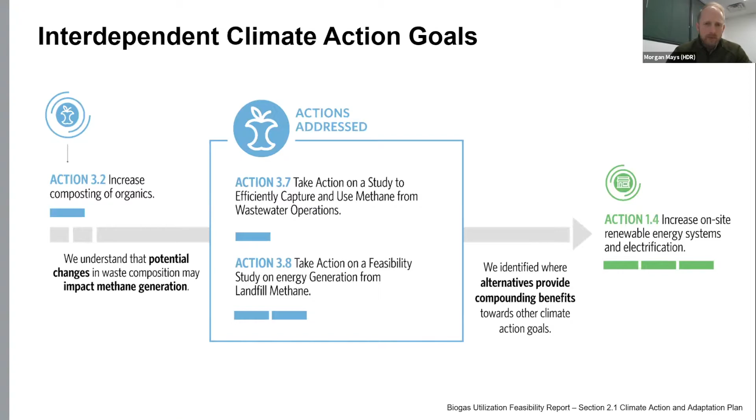So just a brief history of the project. We started this about a year ago, really. Last February, we provided a waste shed analysis, looking at the solids and organics currently managed by both facilities, as well as what an incremental increase of waste could do to biogas production.

Then we looked at both facilities as a whole, at what their existing and future conditions were going to be, and the opportunity for any recovery and reuse of biogas through the study period, which was a 30-year time period, so from roughly 2020 to 2050.

Then in May, we provided a biogas utilization technical memo that evaluated all the different options we considered for utilizing that biogas at both facilities, and included a natural gas pipeline injection option, electricity generation, and also a natural gas replacement.

In August, we tied this all back together into what I believe you received a copy of in your packet, the full feasibility study report. That evaluated the current and future reuse alternatives and considered the greenhouse gas emission reductions, the energy return on energy invested, and the SROI framework.

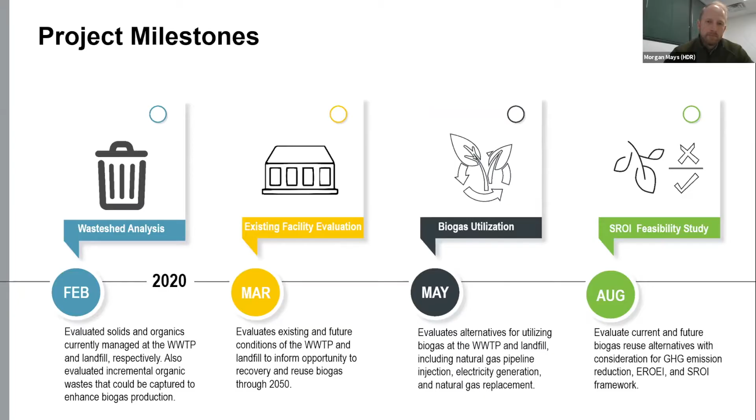So briefly, existing conditions at the two facilities. If you're not familiar with this, the wastewater treatment plant itself is the largest user of electricity and natural gas within the city. It processes approximately just under 11 million gallons a day. Methane there is produced predominantly on site during that anaerobic digestion, and then is currently reused on two on-site boilers that heat the biosolids and promote that digestion, and then the remainder is flared off. I believe about 80 SCFM is produced currently at the wastewater treatment plant.

At the landfill then, it's a full MSW landfill, serves Johnson County, Kalona, Riverside, manages approximately 130,000 tons a year of waste. And then food wastes are approximately 25% of that total waste mass, so about 34,000 tons. Methane there is produced during just the waste decomposition process, collected and then flared currently to the atmosphere. Current levels have that around 945 SCFM. So really a true order of magnitude difference between the wastewater treatment plant and the landfill. So that's something to keep in mind when we look at alternatives.

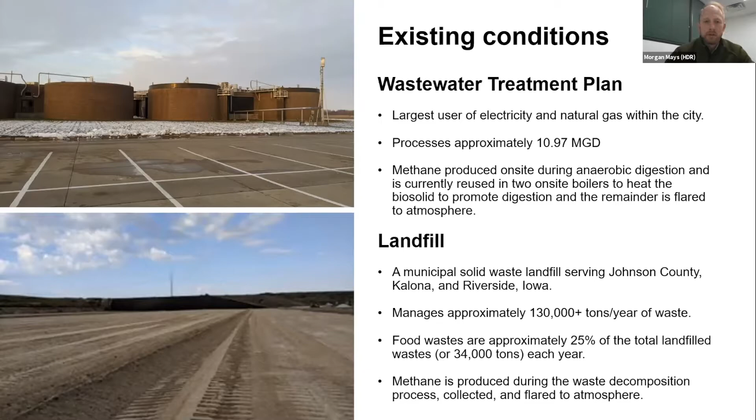With that, I'm going to pass it over to Marcella and kind of talk through the process. Yeah. All right. So as Morgan mentioned, in your packet you saw the feasibility study. Just want to point out that throughout the rest of the presentation, you'll see little footnotes that reference specific sections to that. So as you look at that and cross-reference this presentation, hopefully this orientation will make your review a bit easier. So I'm just going to spend the next few minutes reviewing the alternatives as related to both the facilities, the waste diversion scenarios, and the greenhouse gas emission impacts that we built into the SROI model that Jeremy will talk about. Go ahead, Morgan.

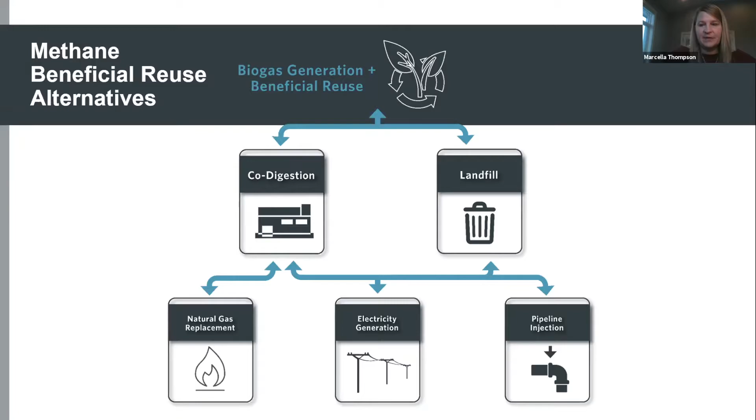So, as Morgan explained, there are two facilities that we looked at with regard to biogas generation and beneficial reuse. That is the landfill and co-digestion. Again, just reiterating that the landfill is orders of magnitude more biogas to work with, which certainly factors into the greenhouse gas emission reduction potential. What's interesting about these facilities, and we see this across cities, is that while they in themselves often represent a very small part of the city's greenhouse gas inventory, they themselves are also enablers of change. So in addition to managing emissions at the sites, you can also offset emissions, which is why reuse is such a strong potential.

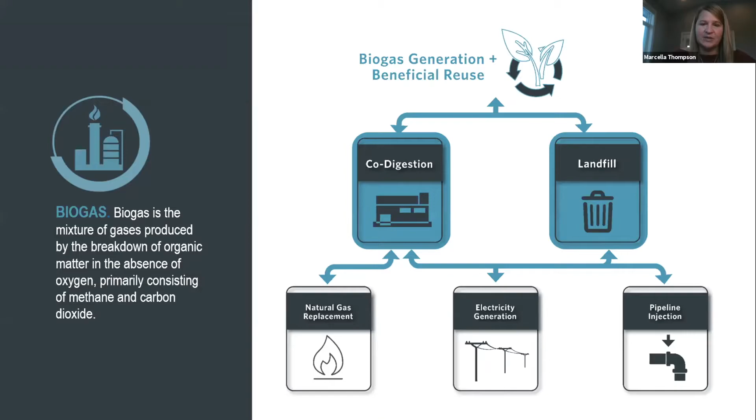So the first option we looked at, which we will refer to as alternate 1, and 1A is co-digestion and pipeline injection at the wastewater plant, and alt 1B is the same thing, pipeline injection at the landfill. So this is where we would take that biogas, clean it up to pipeline quality, inject that into the pipeline to a standard that can meet the renewable fuel standard, and sell that on the RIN market. So the city would benefit through some direct emission reduction on site. There would not be the same offset within the city boundary, as those purchasing the RIN credits would get the reduction out in their realm.

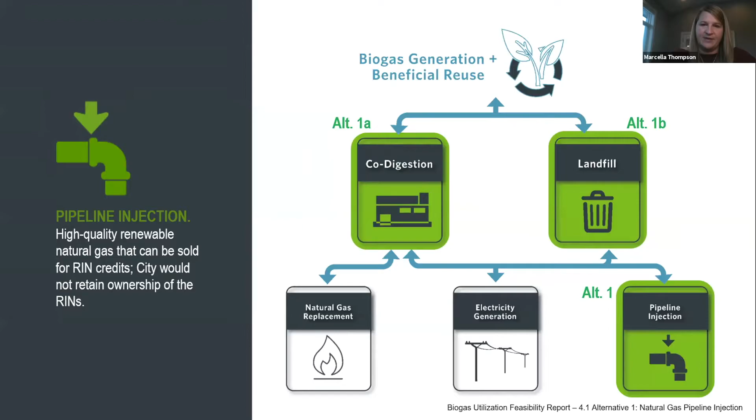The second alternate is electricity generation. This also applies to both the wastewater treatment plant and the landfill. You can advance, Morgan. So this same concept, different scale at both facilities, where we would take that gas, clean it to a quality that it can be used in a generator on site. And then in both cases, we've assumed that the quantity of electricity generated is greater than any of those facilities can consume. So it would involve a partnership with your utilities to put that back onto the grid. We assume that through that agreement, you would be able to retain the renewable energy credits, which would help offset a portion of the city's electricity use with that on-site renewable energy generation.

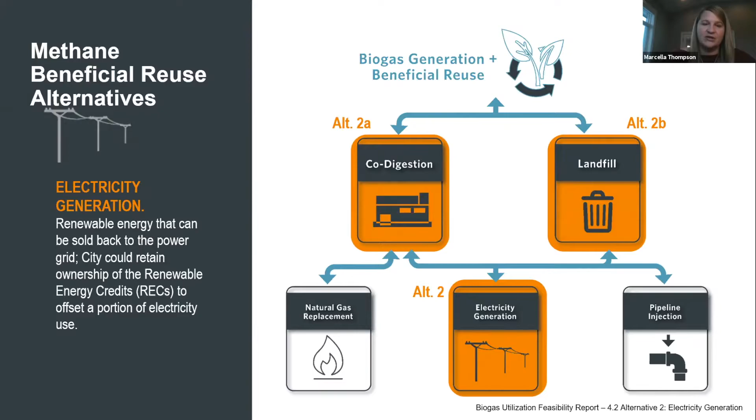And then the last option we looked at, alternate 3, that is natural gas replacement. That one only applies to the wastewater treatment plant. And so that, again, similar to pipeline injection, where you're cleaning that gas up to essentially equivalent to natural gas, but it would be used on site to displace natural gas that's used. So you realize a cost savings there, as well as a greenhouse gas reduction benefit. Just as a reminder, in all cases, when we're thinking about biogas, it's considered a biogenic carbon source. So when you're composing your city inventory, biogenic carbon is reported separately. So you would realize a reduction related to natural gas or electricity generation.

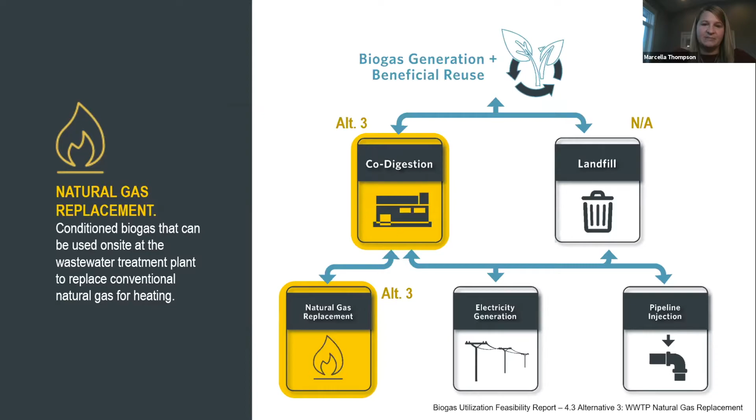So another important factor, so we just walked through 2 facilities with 3 alternates. The other key factor was, as Morgan mentioned, we understand that a lot of your climate action strategies are interrelated, and certainly in the case of organics management and what the city pursues from incremental diversion will impact those alternates.

So we looked at 3 scenarios. One is the business as usual, right? How much organics is being diverted today. We also looked at a scenario which we called the 1,500 tons per year scenario, which represents the incremental capacity of the wastewater treatment plant to co-digest those organics.

And then the second one is a low diversion alternative. So that is a 20% incremental capture of organic material, which equates to about 8,500 tons per year. So that would be in pursuit of that organics recovery climate action strategy. And we looked at these scenarios specifically in those earlier studies in terms of how would that impact the methane generation, both at the wastewater plant and the landfill.

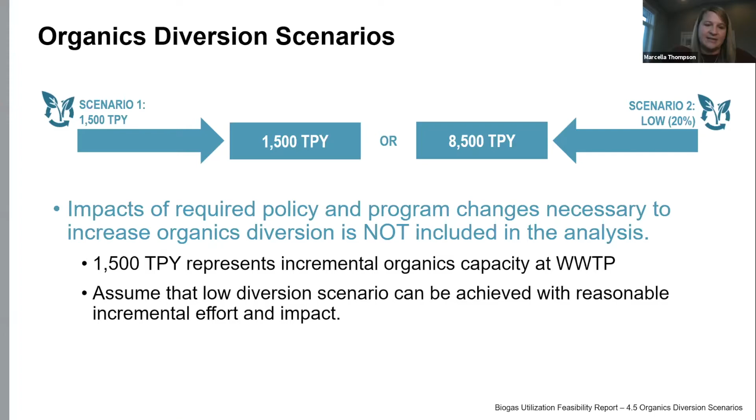And then we ran through the SROI analysis for, again, 2 facilities, 3 alternatives for these 3 different scenarios. So there's lots of iterations that will come to light as Jeremy presents his results. The last thing I wanted to touch on is the greenhouse gas emissions impact that we considered. And you can see here, we've got table 10 within that report. So there's one of those cross references for you.

We looked at 3 different greenhouse gas emission impacts. One is the direct emissions. So it takes energy and results in emissions to add additional equipment to scrub the gas, to run the generators, right? So there is some invested carbon in those technologies. So we looked and accounted for any incremental emissions from those processes to beneficially reuse the gas.

We also use the EPA WARM model to consider life cycle, cradle to grave impacts. And that really came into place of the alternates where we went from the baseline, business as usual, what you're diverting, to what happens if we pull that out of the landfill and co-digest that, or if we composted that, et cetera. So that accounted for the life cycle emissions from those landfill diversion alternatives.

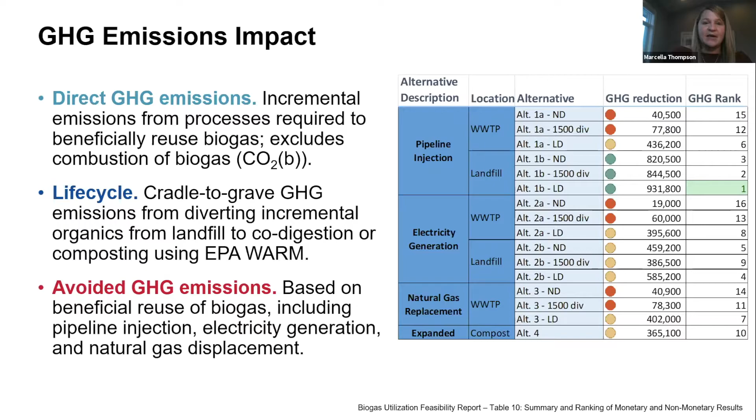And then the third one is avoided emissions. So particularly in the electricity generation and natural gas displacement, there are avoided emissions from not having to procure that electricity from the grid or buying natural gas and combusting that. And so those were accounted for as well. And so that's one of 2 key inputs into the SROI model. The second one was also the energy return on investment that I'll let Jeremy talk about.

Yeah, thanks, Marcella. So energy return on investment is basically a fairly straightforward calculation. So it's a ratio of the energy output that's gained against the energy input that's required. So think of it as a ratio of how much energy do you get versus the required energy to produce at a set or a given level of energy output.

So similar to the greenhouse gas emissions for this analysis, we worked through basically what is the equivalent amount of energy that's delivered, whether it's natural gas or electricity, and then put those all in common units and compare the energy output minus any of what we call parasitic energy, or the energy used to produce that level of output, and then created a ratio of that against the direct energy input. We also computed this over the life cycle of the project, say over a 30-year period, and then computed that ratio.

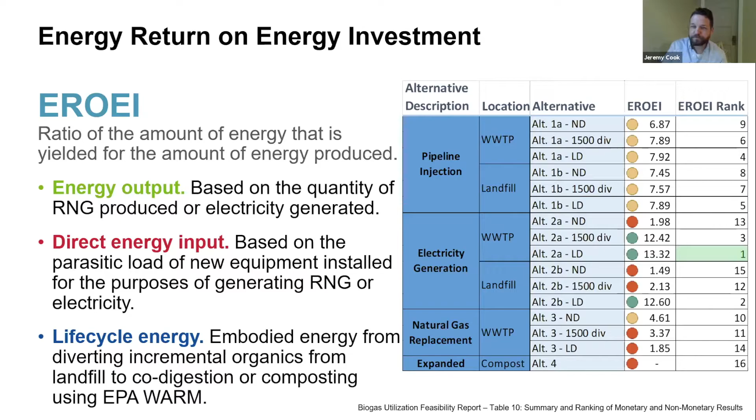And so similar to the previous slide, what you see here, again, this is table 10 from the report, which shows you the overall score. So the higher the score, the better the EROEI, and we have the ranking of those for all 16 alternatives. Next slide, Morgan.

So we've touched a little bit on SROI, or sustainable return on investment, and this is one of the figures that you'll see actually in the biogas utilization report. SROI is a triple bottom line economic analysis framework, if you will. It came out of the Clinton Global Initiative in 2007. It's something that HDR developed, in partnership with the Clinton Global Initiative, as a way of evaluating broader climate, sustainability and resiliency effects of projects beyond just traditional cost-benefit analysis frameworks.

And so it relies on a few key principles. One is a triple bottom line accounting of impacts. So economic, environmental, and social are the key bins there, if you will. And we also try and monetize as much of the range of effects as possible. In this case, though, for this project, we focused on electricity generation benefits, greenhouse gas emissions against life cycle costs. But then another aspect of this is we try and incorporate as many economic or monetized values as we can, and also key performance indicators.

We can't always monetize everything. Even as an economist, I like to try and monetize effects and put them into general comparisons, because that gives us a common unit for comparing impacts. But we can't always do that. So we've already talked about the EROEI as well as the greenhouse gas, and those are two key performance indicators that really relate to the effects and goals of the climate action plan here for City of Iowa City. So we basically try and present as much as we can both the performance indicators, kind of non-monetary effects, as well as economic values. So with that, next slide.

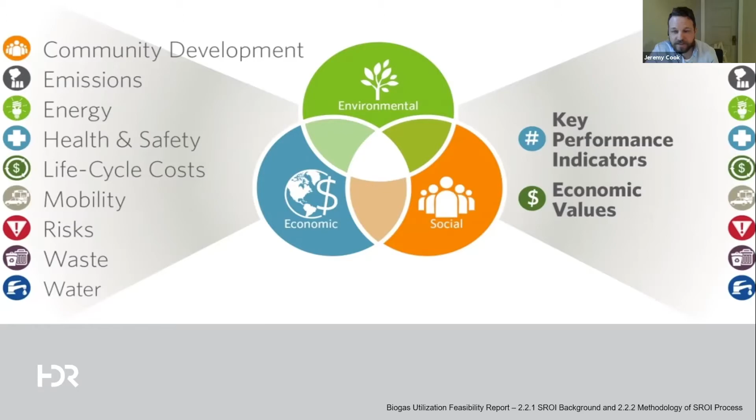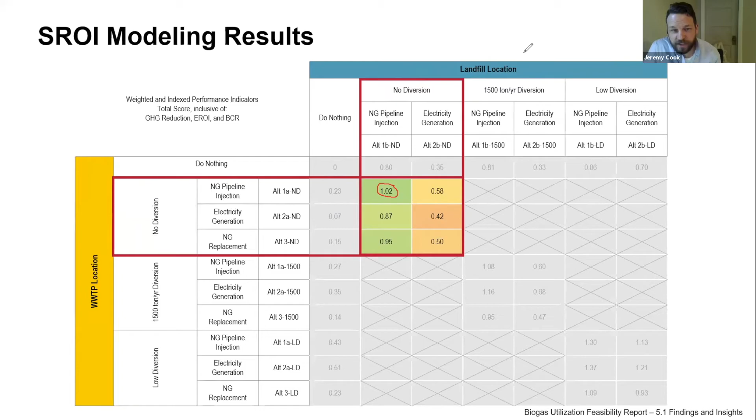Similarly, as we go up to the 1,500 tons per year diversion on the next slide, we have a similar construction, but this time our highest score, because we're getting some value back in terms of electricity generation, you stay with the pipeline injection at the landfill, but add electricity generation at the wastewater treatment plant. That also holds true for the low diversion scenario. If you were to increase up to 8,500 tons per year of diversion, you'd have a score of 1.37 for your highest ranked alternative, which again includes pipeline injection and electricity generation.

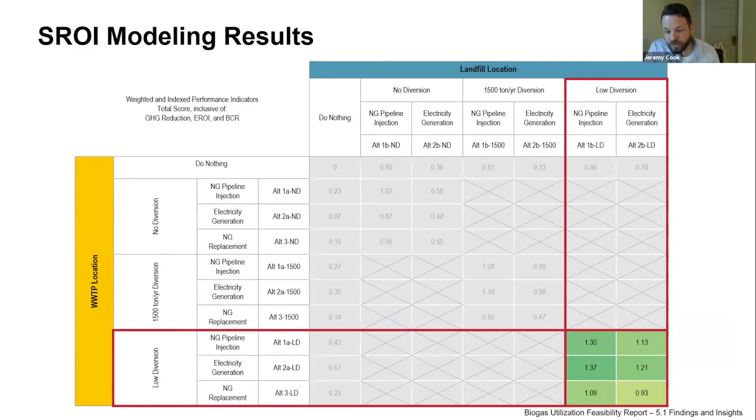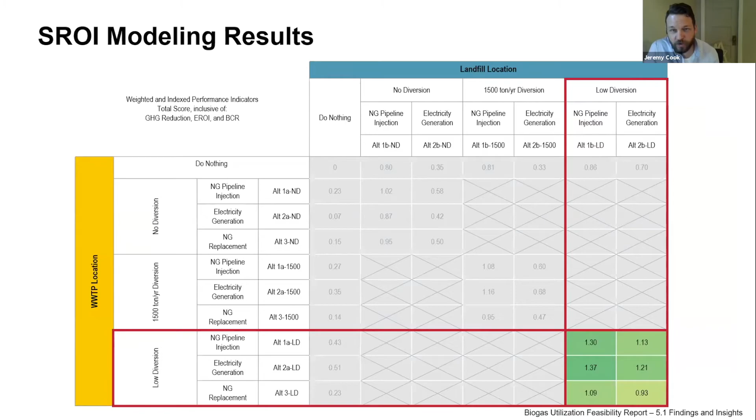So again, this is summarized. There's an explanation of how all this works in the feasibility study. That section of the report lays out how you need to follow the logic for this table and combine alternatives. So we can see where the highest ranked alternatives are. The next question was, what are the financial implications? Is this financially actionable? So we added a supplemental analysis at Joe and the city's request to do a financial payback period to see how this would all pencil out. On the next two slides, we have a quick summary of the financial analysis. Again, pipeline injection at the landfill is the best alternative if you're just going to do one alternative initially.

From a financial viability standpoint, it is actually the only alternative that generates a payback on its own within the 30-year period. And actually all of these alternatives can break even with a bond term of at least 18 years, which is a fairly robust result considering sometimes bond terms go as far as 20 to 25 years. For all of these alternatives, operating costs do exceed the financial benefits. So that is the thing that's really holding back the other alternatives.

On the next slide, we did identify that on the electricity side, if you could get like $20 million in grant funding, or if you were to negotiate an electricity sales buyback, then electricity generation at the landfill could break even within a 30-year period as well. But again, you need basically a grant or investment to help

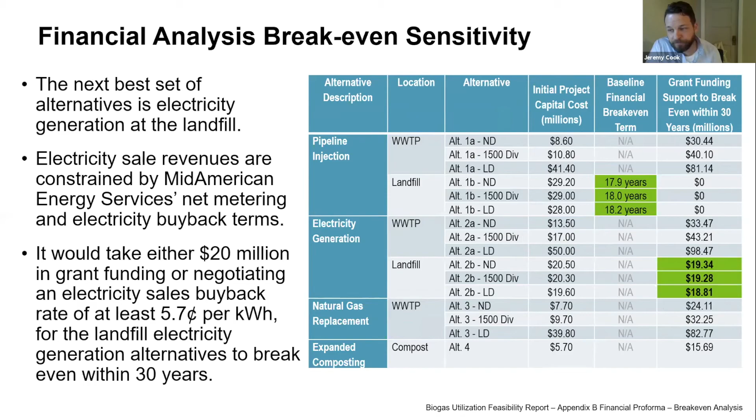make that happen. In general summary and potential next steps, I understand you all received a copy of the report, so our whole team is going to be available at the next meeting to field any more in-depth questions you may have and give you the opportunity to go through that report in more detail. So, in general summary, this looked at 18 unique possible combinations, in addition to those 3 lanes or scenarios at each facility that you could look at.

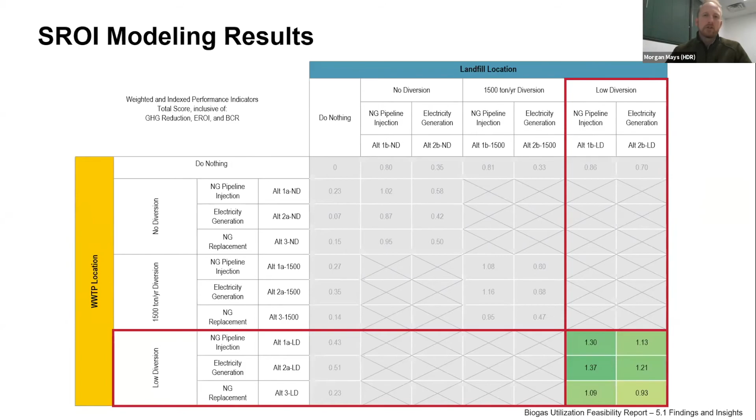I do want to point out that low diversion is at 8,500 tons a year. That actually exceeds the capacity that your existing wastewater treatment plant can take. So that requires a separate co-digestion facility or an expansion of the existing digester facility. That is part of why those costs, if you look through the report, are so high on those items. So that's an important note, and why you have this matrix, that everything aligns with that. If you have a low diversion scenario, you are looking at both facilities treating it. But really we're aligning those organics recovery, right?

So the first step, and we offer a path forward suggestion in the report, is really for the city and the Climate Commission to come to terms on what targeted diversion scenario makes the most sense for you. We've listed a couple different alternatives and options, and we really want to narrow down the list. If we can narrow that list down, then we can look at what the next steps would be and dig further into the cost estimation. It's important to remember this is a study level. Those cost estimates have a fair amount of contingency to cover the unknowns that are certainly numerous at this stage in the process.

So further evaluate what the full life cycle cost of a co-digestion facility, if desired, is going to be, or which biogas utilization option is best, either electricity generation or natural gas pipeline injection. Once we have a clearer path forward, we can start to connect the dots between other projects. There are projects at the wastewater treatment plant that look at rehab to the digester. So maybe there's a chance to align projects and find some efficiencies in costs. Similar to how we looked at the different action plans and the connections between them, there are options to minimize that capital cost at the beginning and align it with the other projects. Ultimately though, until we get those clear paths forward designed, we can't move into bringing a project from idea to reality.